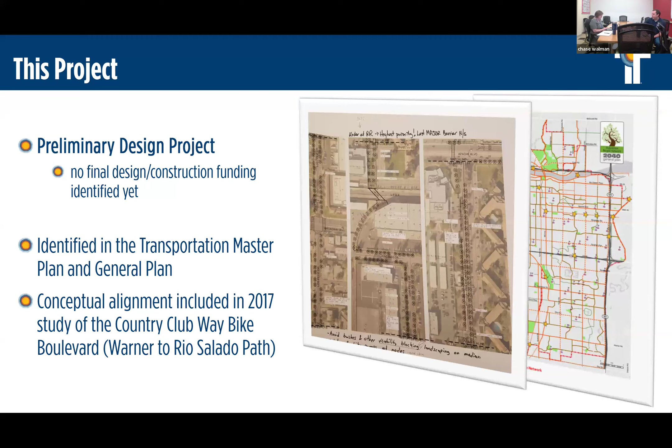So that preliminary design project ultimately culminated in many different phases. Given the size and price of the entire 7.5 mile bike boulevard, the project needed to be split up into phases. This image on the right is showing the bike boulevard alignment. This orange line is the Country Club Way Bike Boulevard, the one that we're talking about today.

We have phases north and south of this project already programmed for design and construction. This is the last remaining gap between those projects, between Broadway and Apache Boulevard, where we don't currently have the program funding. So this is a first step for working towards that.

So the corridor from US 60 to Warner Road is under construction now and is anticipated to be complete later this year. As we work our way north of the 60, this project from the 60 to Broadway Road is programmed in the city's 5-year capital improvement program, and we are anticipating beginning design for that in 2025.

The corridor north of this project is at Smith and Apache, from Smith Road from Apache to Rio Salado Parkway. That's our Smith Road bike lane project, and that project is also phased, but currently under construction, and that will leave off at Rio Salado Parkway. Then north of Rio Salado Parkway, in the interim, we are working with Vestar, the property owner, to find a connection from Rio Salado Parkway to the south bank of the Rio Salado path, as well as pursuing additional grant funding opportunities to complete that gap.

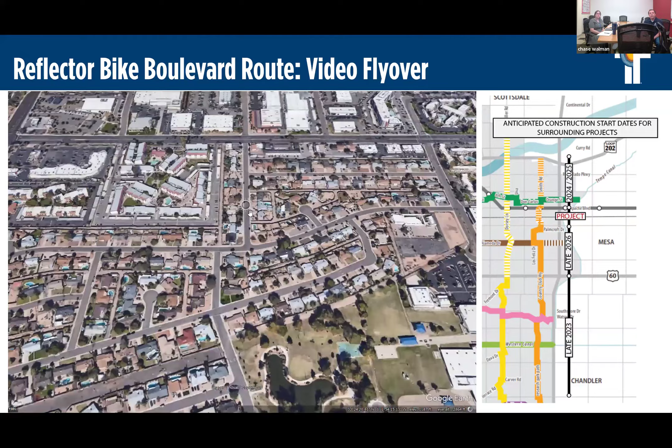As we get to Broadway Road, this is the southern terminus of our preliminary design project at Los Feliz and Broadway. We'll get into an industrial area, primarily industrial land uses with no sidewalks and no striping on the roadway. There's a functionally abandoned railroad spur here.

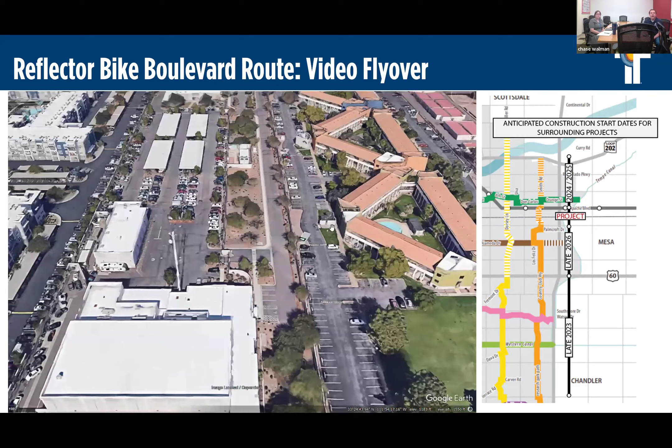To the north of here is where we would connect to the Apache Police Department Substation Drive. As we continue east along Apache, we'll be proposing protected bike lanes to connect to our Smith Road bike lane project and the light rail.

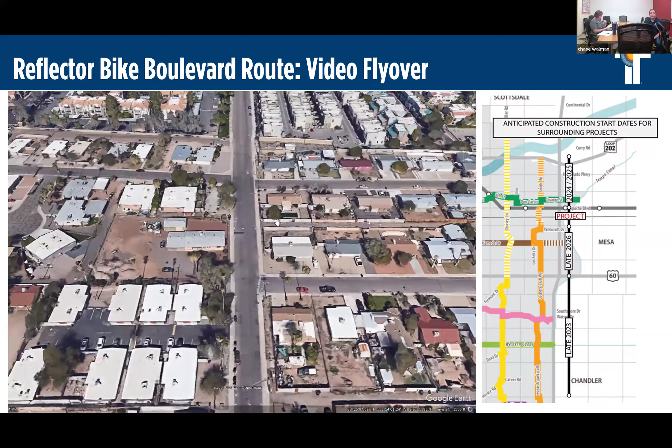From here, this is that Smith Road bike lane project, which will be implementing bike lanes as well as some pedestrian accessibility improvements along the corridor. This continues all the way until Rio Salado Parkway.

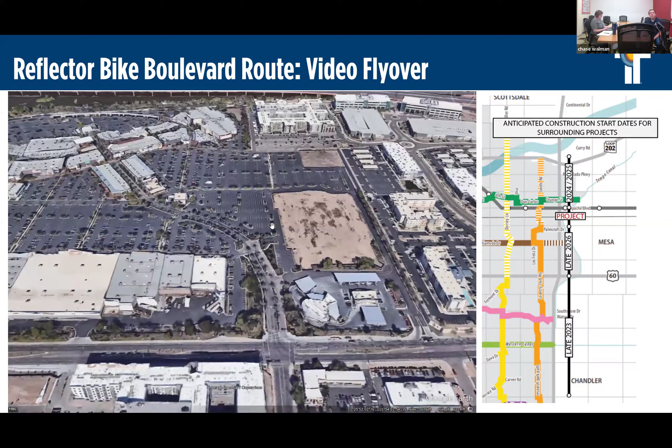From here, this is the Tempe Marketplace gap, and this will connect eventually to the Rio Salado South Bank path, where you could either go east into the city of Mesa or go under McClintock Drive using our underpass and connect to the Rio Salado South Bank path, which continues west into Tempe.

We're ending this video here at an area of two other future program projects. That includes the Rio Salado North Bank path connecting the Indian Bend Wash to McClintock Drive, as well as an upstream dam bike and pedestrian bridge, which will eventually connect the north and south banks of the Rio Salado Path system.

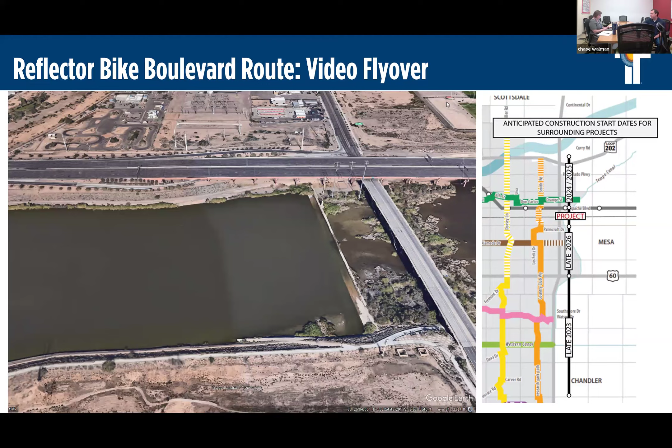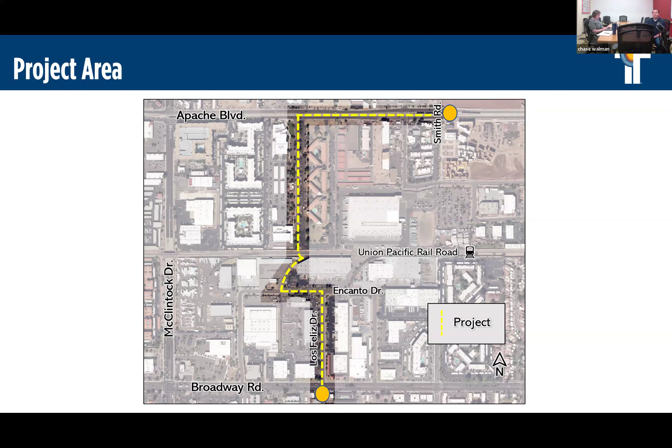In September of 2023, we held our first round of public meetings. The public outreach period was held from September 14th to September 28th. In total, we received 92 total survey responses. Most respondents lived in Tempe, with 41 respondents living within a mile of the project corridor.

I'm now going to look at some existing conditions as well as go over some of the public outreach that we heard from our first round of public meetings.

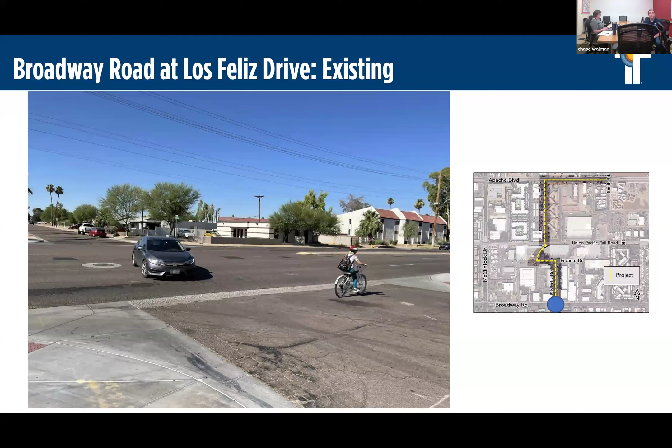This is a view looking south at Los Feliz Drive and Broadway Road. This is currently looking at the intersection, which is unsignalized.

We're now getting into the industrial area along Los Feliz Drive. This is at Los Feliz and Broadway, looking north towards Encanto Drive. You can see the existing condition here is about a 40-foot wide roadway without any striping and some sidewalks. There is some varied landscaping, which includes some mature trees, turf areas, as well as decomposed granite.

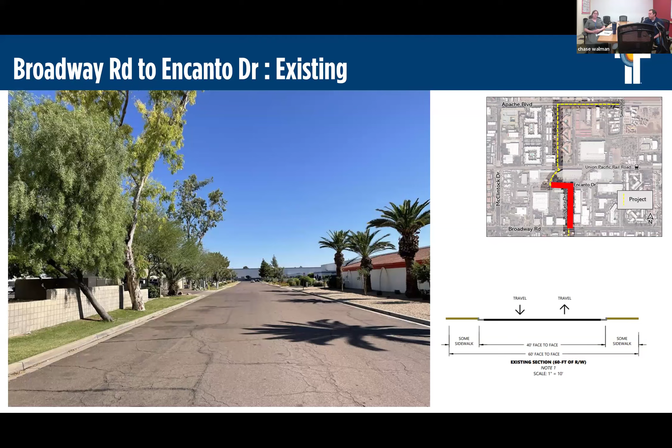Some of the public outreach we heard from the first round of surveys was a consideration for protecting in place some mature trees along the site, as well as providing an opportunity to supplement with additional new trees for both pedestrians and bicyclists along the corridor. Although this is just a preliminary stage and we don't specify any landscaping yet at this 15% design, this is something we will obviously be looking into if the final design gets funded. So that is something we will be considering in the future.

In addition, there was a desire for increased separation between vehicles and bicyclists. Previously in our first round of public meetings, we were proposing a standard bike lane with sidewalks. This sentiment about separation between bicycles and vehicles was shared as well with some of the property owners within this area. The concern here was the intermingling of freight traffic along this corridor, as well as being able to resume business operations with staggered freight deliveries along the corridor. So being cognizant that these curb lanes are used for additional freight traffic, we're looking to respond to that in our preliminary design.

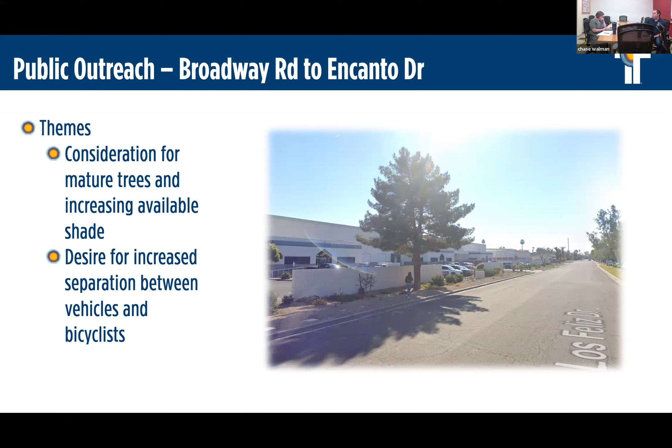This is as we are approaching our South Bridge landing.

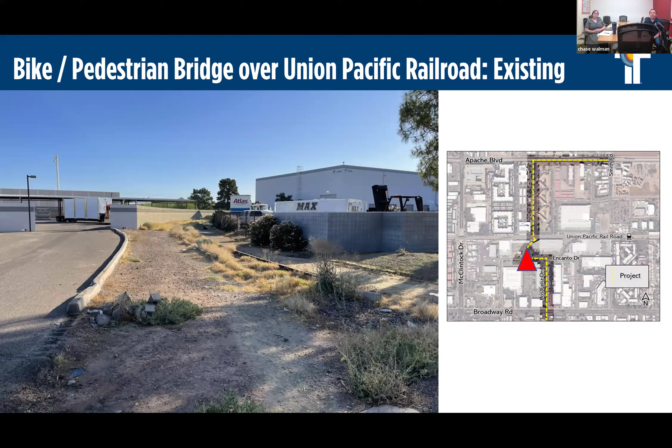Something else we heard from adjacent property owners was concern for continued trespassing they observe in this area. Right now, this is an open railroad spur where adjacent property owners have stated they experience persistent trespassing, both from Encanto Drive and along the railroad spur. This is an image looking west along the railroad tracks.

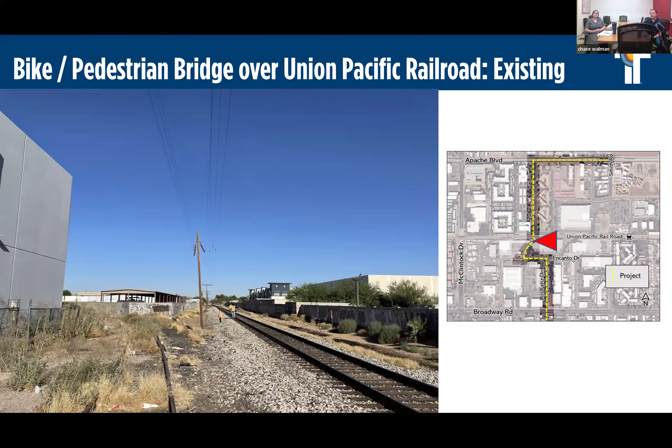Now we're north of the Union Pacific Railroad along the Apache Police Department Substation Drive. This is a view at the south end of the property, looking north towards Apache Boulevard. This is a view from Apache Boulevard at the driveway entrance, looking south at the Apache PD Substation Drive.

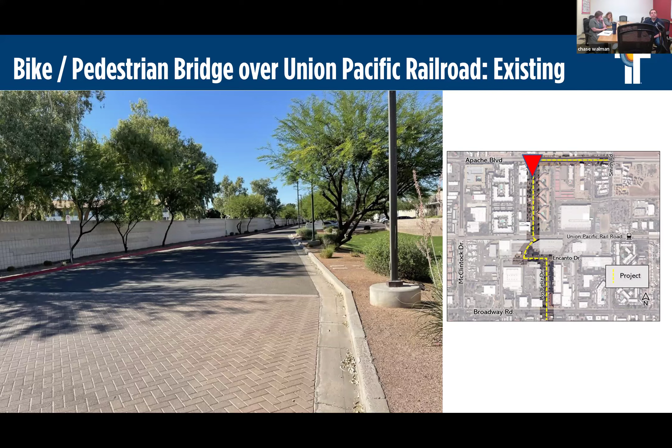Some themes we heard for this bridge segment were to increase visibility around turns. There are multiple turns due to the natural alignment of this railroad spur, and we needed to account for the vertical clearance required for Union Pacific rail cars. That was a consideration we looked at as we revised the designs.

There was a desire to reduce slopes of the bridge where possible, while still complying with ADA accessibility requirements, as well as providing an opportunity for respite along the project corridor.

Additionally, there were desires for solar panel integration. This could be used to power the lighting along the bridge, as well as functionally act as shade for the whole bridge corridor. Many responses wanted increased shade, so we tried to directly respond to that. Additionally, with the trespassing concerns, we looked at what kind of access is provided underneath the bridge and limiting those opportunities.

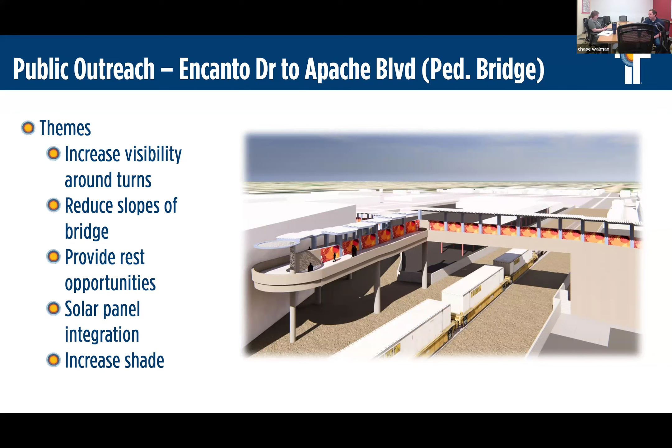Finally, working our way north, this is the Apache Boulevard section. This is looking along the north curb of Apache Boulevard, looking south towards the PD Substation Drive. This corridor has standard bike lanes currently, with a minimum for most of the corridor of 8-foot sidewalks. There are some different design treatments as well as very shallow setbacks of the buildings along here.

These also provide shade opportunities along the corridor. You'll see some additional site furnishings such as benches or bike loops, and some supplementary pedestrian and street lighting as well.

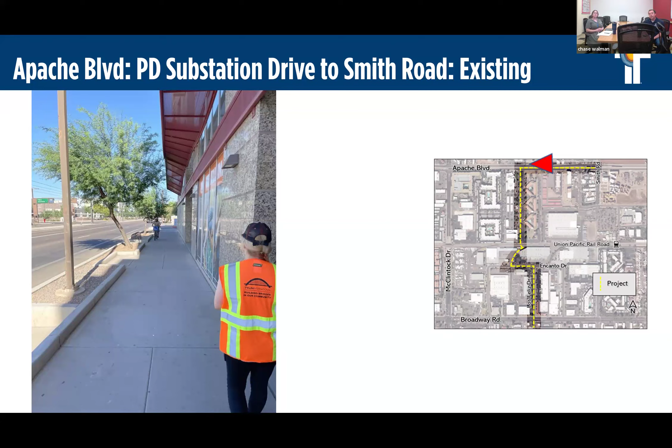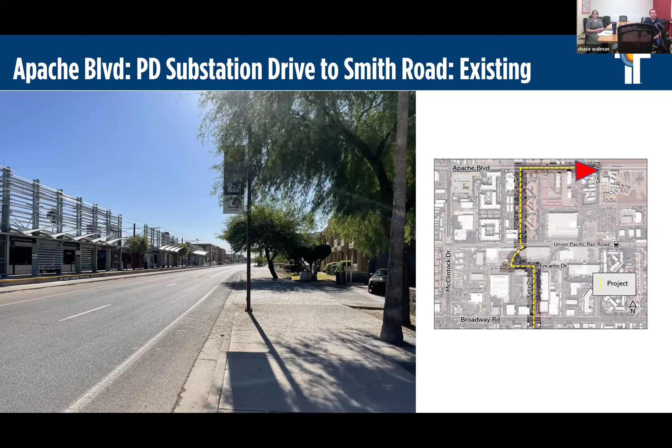This is the final view looking at the light rail station at Smith and Apache. This will be our northern connection to the Smith Road bike lane projects, which continue north to the Rio Salado Parkway.

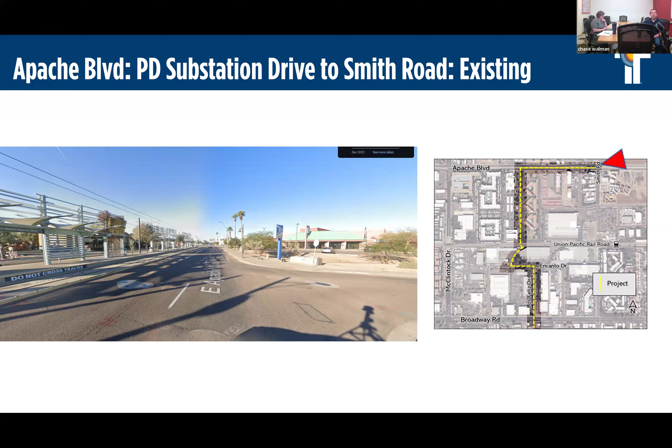At our first round of public meetings, we asked for feedback on two different design alternatives: one a raised bike lane, the other a protected bike lane. Some themes in support of the raised bike lane were that users would not have to interact with the curb and gutter, that seam between the pavement and curb and gutter. There were also concerns about the vertical delineators and bollards and the ongoing maintenance for those, as well as providing additional separation by grade between vehicles and bicyclists.

Some themes in support of protected bike lanes included perceived better visibility, specifically with driveway integration, and visual vertical separation elements. The vertical delineators are mentioned here too, this time not for the maintenance concern, but for providing vertical separation and queuing. And then consistency with at-grade bike lanes on Apache. The existing condition is on-street bike lanes, so this would remain consistent with that same grade, without users having to go to an elevated grade for a small segment of Apache.

This came out to about 47% in favor of the raised bike lanes and 53% in favor of protected bike lanes.

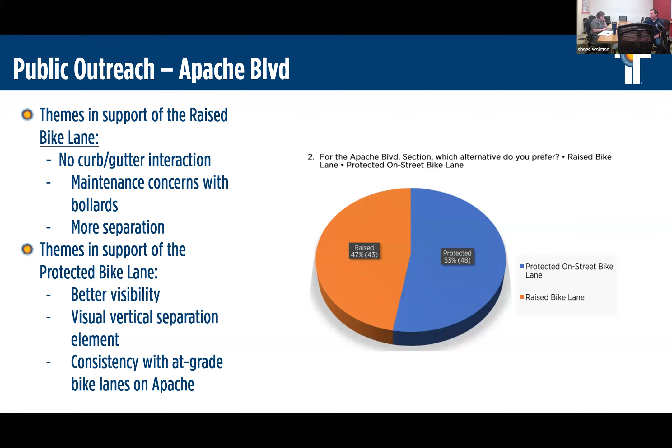With that, I'm now going to hand it over to Ryan, who will go more in depth into our preliminary design and how we responded to some of the feedback we heard.

Hello everybody, my name is Ryan Wozniak. I work for TY Lin, Senior Transportation Planner. It's my utmost pleasure to be part of this project and help lead the design efforts. It's been great to be in partnership with the community and staff throughout this whole process, so 100% my pleasure to be part of this.

We're going to start at the southernmost terminus here at the intersection, which is conceived to provide an additional signal at this location where one doesn't currently exist. What you see is the start of a conceptual intersection, trying to promote additional visual cues, high contrast crosswalks across Broadway, and most likely some crosswalks across the additional pieces there too.

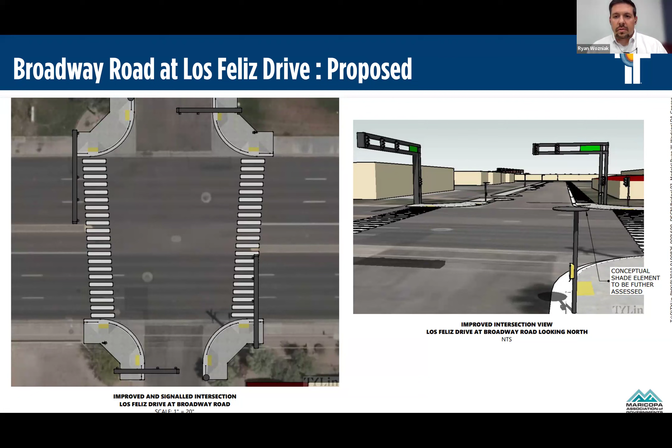Just a start of a concept there that we can build off of in future phases. These projects tend to have about 5 steps of design. We're at the first step, so there'd be 4 more passes at refining these details, with a lot of things still loose at this stage, and incrementally getting more nailed down as those design phases occur.

That we can move into the industrial section. Los Feliz travels north and then to Encanto Drive, which will then connect to the base of the approach to the bridge. Starting off in the industrial section, obviously not a whole lot of eye candy in industrial complexes, but from a user experience standpoint, we are trying to find the most attractive multi-use path within this section, starting with the...

We'll start off with the east edge. This is going to maintain just as a sidewalk condition, with the general pavement being served for all the freight traffic and commercial purposes. We're trying to use some bump outs here at the west edge of that pavement to provide a little additional protection for the multi-use path, which is being designed to City of Tempe's standard width of 10 feet, providing for bi-directional use.

So these bump outs also provide additional planting zones where we get to introduce some new trees and plant species. What that bump out also does is provide a little bit of warning space as people approach that multi-use path, so they're able to stop before there's an immediate conflict between turning into a driveway and reaching that vulnerable user in that context.

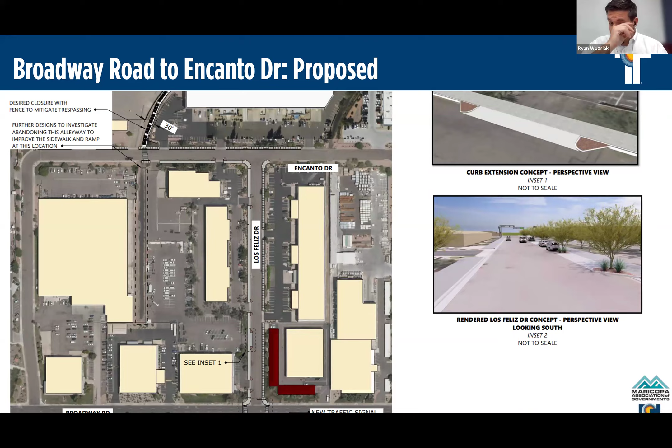Here's a blow up of that rendering to show how those curb extensions provide that planting zone and the multi-use path, the lighting condition — all of which try to provide a more comfortable condition for users of the path.

Here's a bit of a breakdown of existing conditions in the pictures on the left side of the slide. We noted in our field reviews that there's overhead lines that'll need to be addressed in future phases of design. Here's the abandoned tracks that are no longer servicing the community. Obviously, lots of overgrown conditions, litter, and some encampment activities happening in this area, all of which are concerns for surrounding property owners.

But we think that this design will help address a lot of that. We've helped to create barriers for trespassing and the vandalism that's currently occurring back here. There's plenty of graffiti along these walls, along the railroad, but this project will close off access to the railroad from Price Road. So this corridor will still be open for trespassing from that route, but from the industrial route, or this attractive crossing, it should not promote any more vandalism, access, or trespassing in that regard.

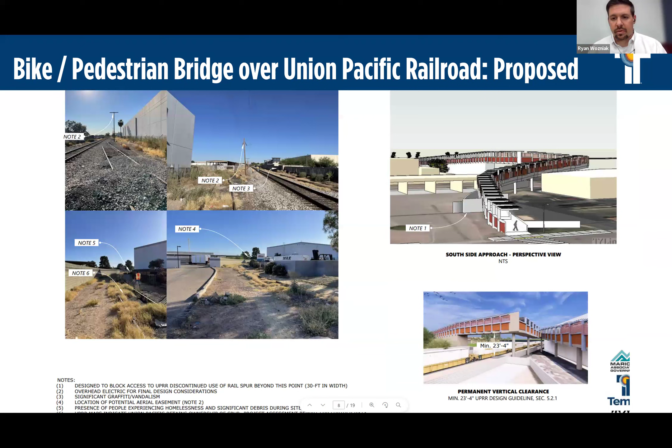It will be flat across the condition of the bridge, and then on our approach to the north, between that end of the bridge and this end of the landing, gives us a nice long run. This gives us a way to make for a nice gradual condition, 4.5% all the way down. So this will be a little bit friendlier on the slope because of the space that we're allowed.

This long drive provides... the drive at the police substation does shift to the west and has to be reconstructed on either edge to maintain 20 feet of access for emergency vehicle response.

We do try to maintain a landscaping area for those trees to continue to make that as comfortable of an environment as possible. And there's some parking that's reconstructed here at the evidence building. We have one utility box that creates a bit of a pinch, but still maintains ADA access along this side.

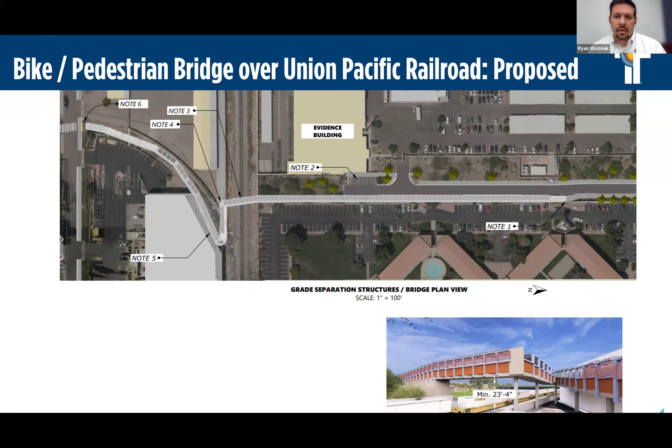This is the view looking south. So this provides you kind of that orientation for this picture over here of the perspective rendering. Shows the sidewalk on the police substation side, shows the multi-use path on the east side. Police have asked for an additional barrier here between the multi-use path and emergency response vehicles to help mitigate for potential conflicts.

So nobody can misbehave too erratically to disturb emergency response times, I guess is the concern.

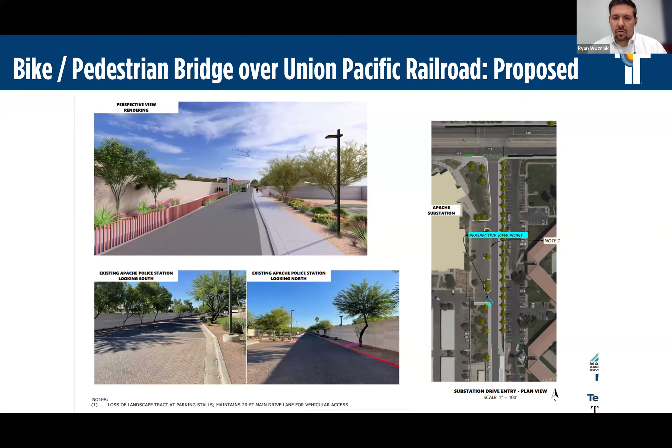These are existing conditions that show the wide drive today. This condition would have to be widened in order to provide that comfortable multi-use path that you see here in the rendering. The drive basically stays in the same condition at this intersection.

And now that we get to Apache, you start to see these markings and protected bike paths at street grade. And so we'll get into a little bit more detail on that in the next slides.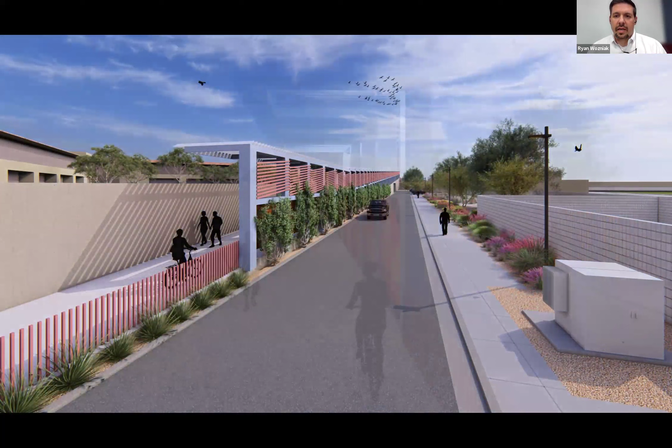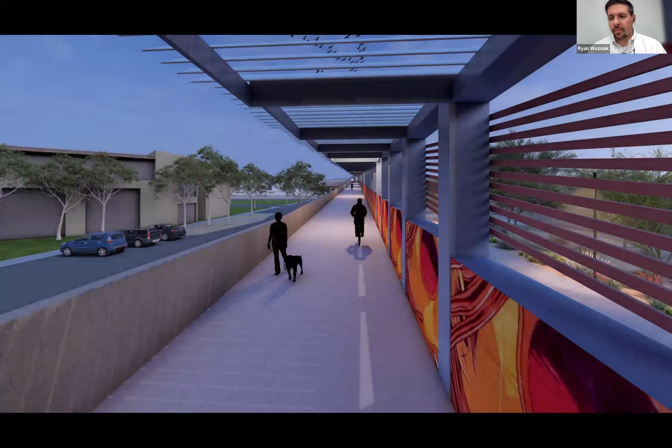We've tried to balance both the need for screening view sheds into sensitive areas while also providing as much openness and airiness to make users feel as comfortable as possible in the space. We have these shade slats that are angled at just the right angle to provide maximum shade for summer solstice and minimal shade for winter solstice to maximize climate comfort throughout the seasons.

This is a view from inside Police Substation Drive, looking up at the bridge. Nice gradual slope that I highlighted earlier.

So as people make this wraparound, yes, it's sort of conceived as a metal, perforated metal to allow for visual permeability, but also shade and feeling of enclosure for safety, so that nobody comes over the concrete wall, the stem wall here.

This art is very conceptual. It's meant to sort of represent future art applications from local artists in future phases of the design.

And this is starting to approach the south edge of the approach as you make your way into the industrial. We're looking up towards the bridge from the industrial complex at this point.

Okay, so this is going to be an animation just to orient you. We have been looking at a lot of the projects so far from south to north. This takes us from north to south. So anybody who has that travel condition, this might give you a little bit better of a look here.

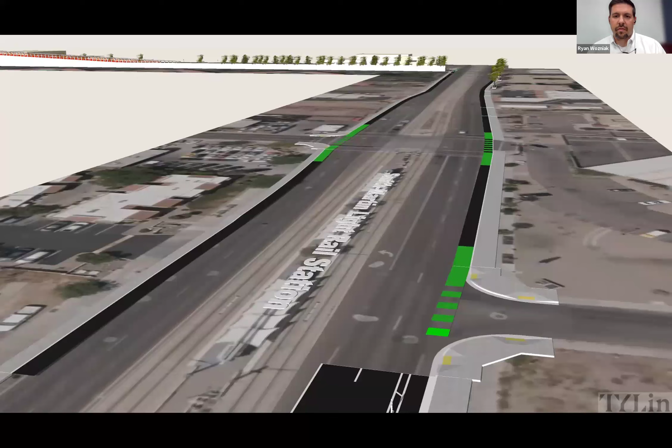Here's Smith Martin Station, and the right off the left edge of the screen here would be the new cul-de-sac development to the south of Apache. Go ahead and start the animation. It's going to move a little fast. Once it gets going, we start looking down Police Substation.

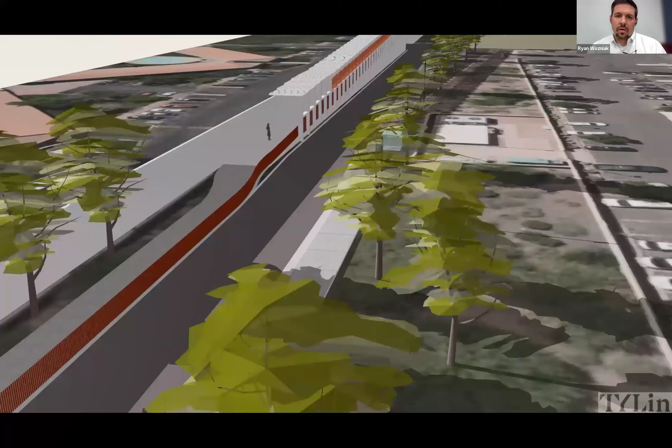This will give you a sense of shadows throughout the day, about a June day.

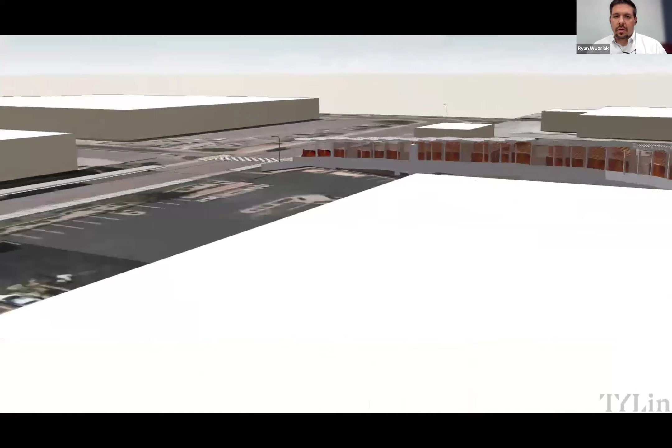Swing around to see down the ramp north, around the curve. Again, perforated materials, screening on one side and lattice on the other, coming down through the industrial park into the new intersection signalized at Broadway and Los Feliz.

It's a low profile curb, and these are becoming very popular installments for budget friendly yet effective protection within these types of contexts. This would help move the project along because the cost effectiveness and benefit cost ratio would show well for future funding.

Competitiveness. So there's a reconstruct zone here — this is where the existing curb is today. The curb would move, widening the road section just enough to provide protected but comfortable navigation at 6.5 feet of bike lane.

The post would be in the middle of that 2-foot section, so you still get some buffer adjacent to the edge of the bike lane before reaching the general travel lanes.

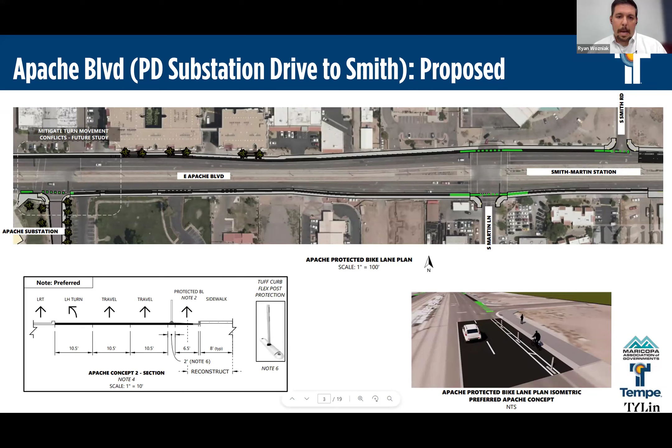A little blow-up of that section to give you a sense of how it would feel in 3 dimensions. This would be a typical half-street constructed condition for Apache, from the start of the project to the end, where we reach Smith.

This would really only be about a quarter mile, between the start of the project on Apache and the police substation. Those conditions would continue to flex and provide as much protection as possible while maintaining lane widths for turning lanes and travel lanes.

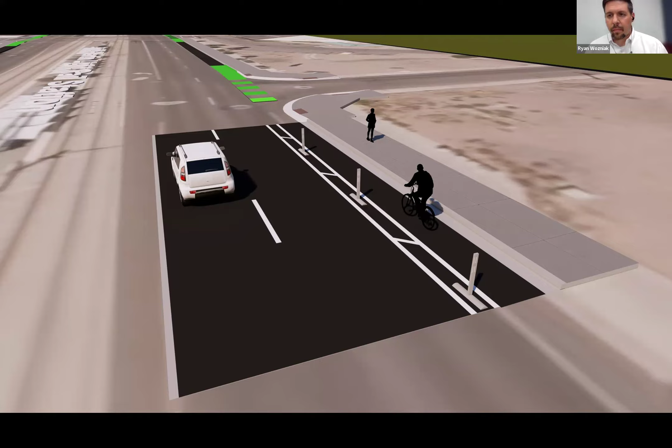As this project continues to be designed, there are more elements yet to be worked into the details — whether that's wayfinding signage, additional seating, additional camera or monitoring for protective purposes, crime prevention through environmental design, more landscaping, more solar panels and shading.

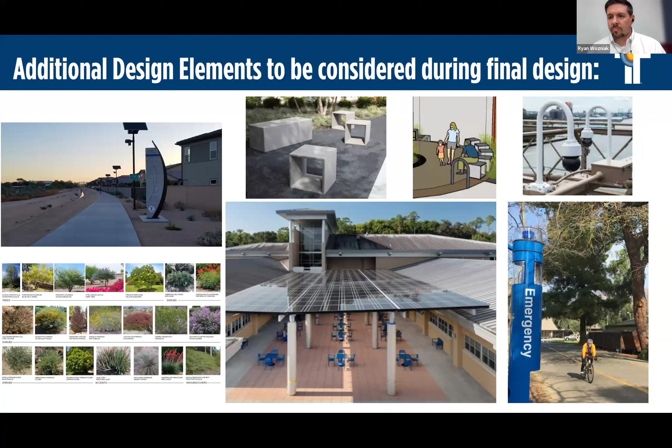And emergency response call boxes. So with that, I'll hand it back over to Chase to talk about next steps and how this project continues to stay on track to deliver something we've heard a lot of excitement about through previous public engagement and all the public comments that came in. We're happy to help keep this thing moving forward.

Thank you, Ryan. One thing I wanted to point out as Ryan went over these elements is that we are really in the preliminary design and conceptual stage. So when talking about materiality and colors, we have placeholder images of where public art integration might be in the future — these are basically placeholders so we can visualize some of these things.

We want to focus on what elements we're providing, like shade, public art, proper ventilation and proper screening. But the design, color, and materiality of these elements — we could explore that further in a final design phase. So these are shown right now more conceptually.

As far as next steps go, we are currently in our second round of public meetings. We received feedback from the first round — Tempe's Transportation Commission, as well as an on-site meeting with property owners, Tempe, and the Tempe Police Department — so they could give their feedback as the main stakeholders in this immediate area. This public outreach will be held for 2 weeks.

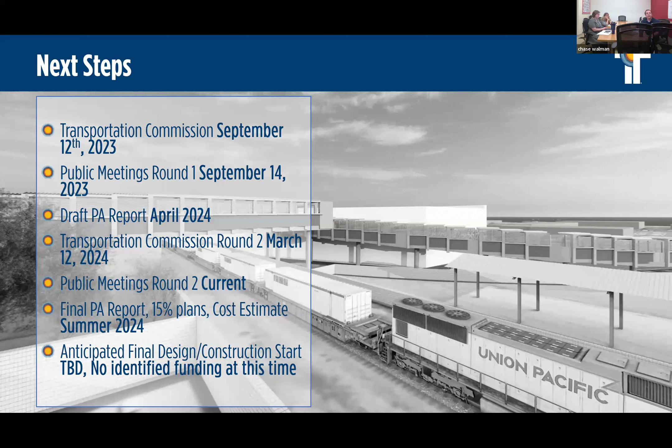The project survey is available at tempe.gov/forum. This is where you'll be able to document all of your feedback, and it'll be collected with all the other feedback received over the next couple of weeks.

The same materials are available online now at the project webpage, tempe.gov/UPRR Bike Ped Bridge. That'll include this presentation. A recording of this presentation will be available on the webpage later, as well as the public meeting boards, which will be displayed in person tonight as well.

With that, my project information is there on the screen. You can reach out if you have any additional questions, but now we will open it up to any questions or feedback that you have currently.

Thanks, Chase. We did have a couple in the chat as you're making your presentation that I'll go through first, and then anyone else, you're welcome to put your questions in the chat, or you can raise your hand and speak as well. So the first question was, as mentioned at the previous meetings, there are already 2 stoplights on Broadway from Price to McClintock. This would add a third. Can the city look at a traffic circle instead? And a traffic circle could also add GSI and shade. GSI is green stormwater infrastructure.

Thank you for that question. That is something that we heard in the first round of public feedback, so we will be exploring that during the final design phase. There are a few considerations we wanted to think through, including bike and pedestrian connectivity through a traffic circle rather than a signalized intersection. Sometimes that could hinder connectivity for those modes of travel. So that's something we're going to look closer at during the final design stage. For right now, we're still proposing a signalized intersection due to that, but we will commit to looking at that as an alternative during the final design phase.